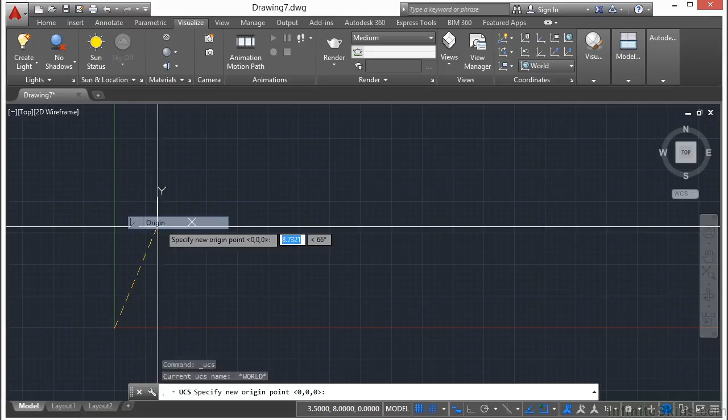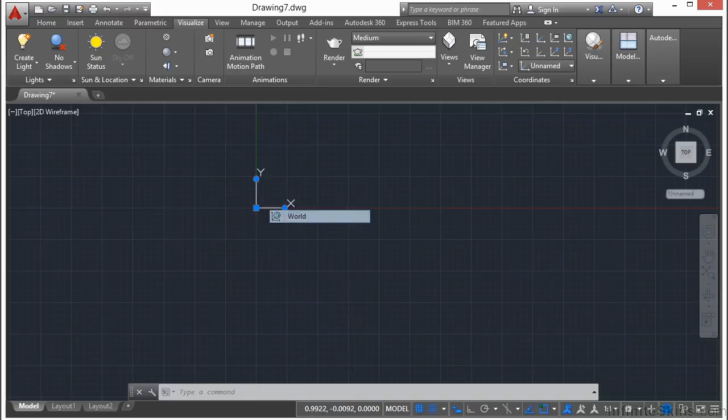You can select that by origin. So you just pick a new point, and there's the UCS. And you can see that little box is off in the corner. That tells you that this is a customized user coordinate system, not the world coordinate system. If I select the UCS, I also get some grip options, which we'll talk about later on. But if I right-click on it and click World, that puts me back to my regular world coordinate system.

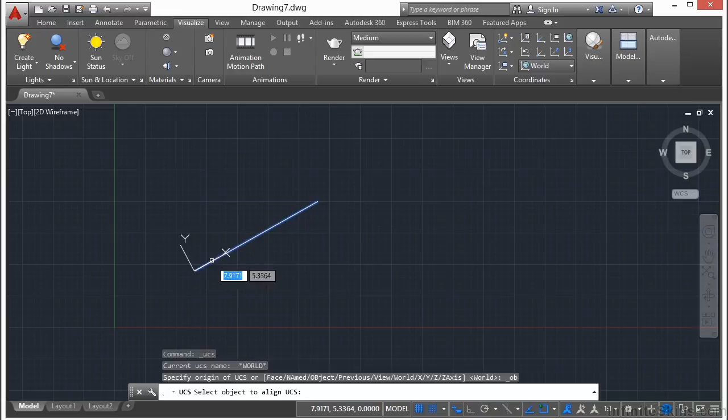So if I have a line, or any other object, I right-click on my UCS icon and select the Object option. I pick an object, and as you can see, it gives me a little preview. That becomes my new user coordinate system. It moves my UCS to a new origin and rotates it to match the angle of the object I selected.

So now if I draw a line and turn on ortho by pressing F8, it locks me into orthogonal lines, which are normally perfectly horizontal or vertical, but in this case it's matching the horizontal and vertical of my new user coordinate system. So this is a great tool to draw things at specific angles quite easily.

Now, when you work in 3D, the UCS is key. There's a function called the dynamic UCS feature that will automatically change your UCS to match the face of an object, allowing you to draw on the same plane as the selected object. That's probably one of the most common cases of changing your user coordinate system, when you're working in 3D.

That's getting a little bit heavy for this course, but it's hard enough to keep track of just 2 axes, much less 3, 4 or 5 different coordinate systems. So we're going to try to keep it simple for you in this introduction. You can create your new UCS from scratch by picking a couple of different points. You can even select the icon and just rotate it or move it.

Of course, my ortho is on, so I'm going to turn that off. And as you can see here, it's quite simple to just rotate the UCS that way. You can grip edit it just to move it to a new place or to make slight rotations, whatever you need to do.

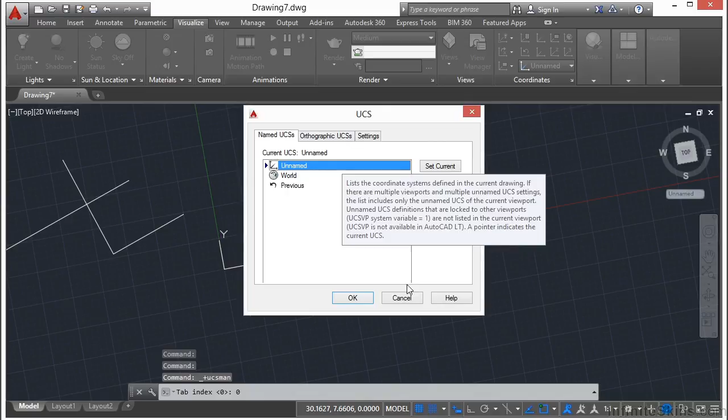So I can get to it that way, which is a real easy way to manage it, or I can come up here to my UCS named UCS option. I can select that, gets me back to the same place. Or I go to my UCS icon, right click on it and click on the named UCS option. So when I come here, it tells me I have three different options.

Essentially, I can go back to world coordinate system. If I select it and hit the set current option, then that's where it will take me. It'll set this selected UCS as my current UCS. Now I can select the previous one, and that will take me back to whatever UCS I was using right before the current one. Now this is the current one and it's unnamed.

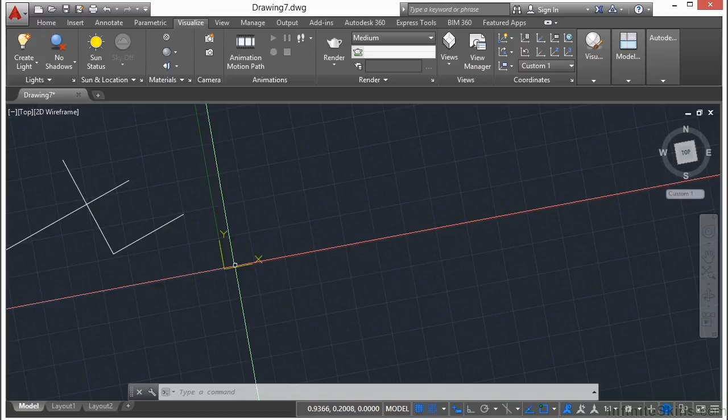If I select inside this box, once I pick it again, I can give it a name. I'm just going to call it Custom 1, press Return. Set current, and it's current. I click OK, and I have it saved in here now whenever I want to use it. So let's say I go back to my world coordinate system.

And if you note here, I'll open up my UCS Manager, go to my named UCS. I have the Custom 1 as a possibility. I select it to highlight it and then hit Set Current. Click OK, and it brings me right back to where I was. So if you go to the trouble of creating a custom user coordinate system, then you really need to save that in case you need to go back and continue working where you were before.

So that's one trick that you can use to help you work in a different coordinate system and to manage that as well. Using a rotated UCS is great for isometric drawings, as you could probably see. But AutoCAD does have a specific mode for that called isometric mode. This allows you to toggle your rotation very quickly and is actually quicker and easier to use than UCS.

Let's open up our drafting settings dialog box by right-clicking the snap icon in the status bar. So you come down here, right-click on it, go to snap settings. So go to the snap type option here and click on the isometric snap. That's what you're going to want to do. You want to turn that on. That will turn on isometric mode, and click OK. So now you see here, you have a sort of skewed and diamond-shaped set of crosshairs.

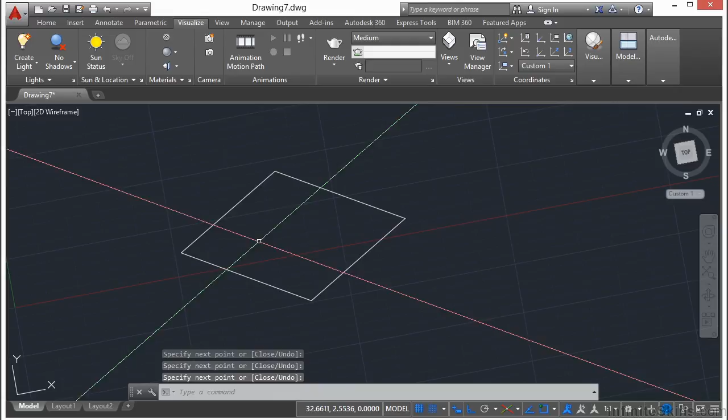So let's start drawing. If I draw here and I turn on F8, this will lock me into isometric mode so that I can now draw 3D isometric set of line works. So I can kind of draw an isometric view of a cube. So I can come down here and I can press F5 to toggle through my different isometric planes. And you can see as I toggle through them, my axes change.

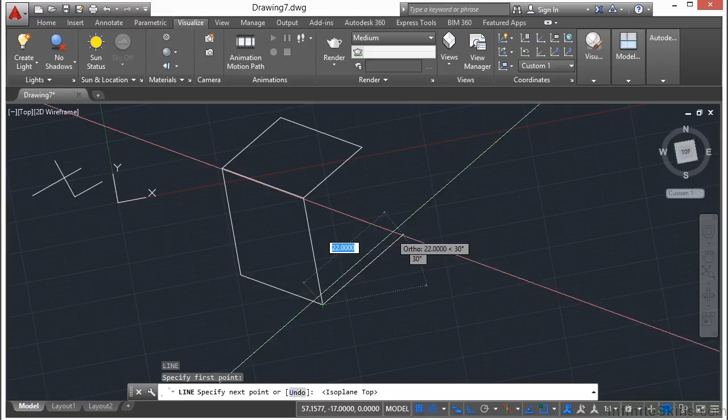And so by very quickly pressing the F5 button, I can very easily draw whatever it is I need to draw. It looks like I've drawn a 3D box, though I've never left my 2 dimensions. So whereas drawing with UCS can make an isometric easy, it's in one plane only. So you have to keep changing your UCS to get that special look that you need.

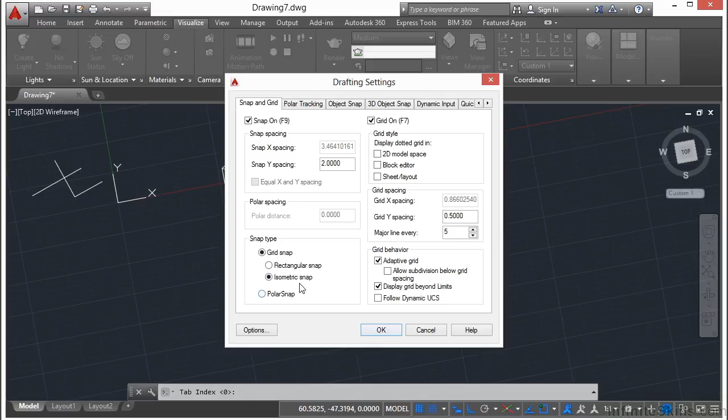You can also use the isometric settings, and you can go to that just by right-clicking on the snap settings, click the snap settings button, and make sure the snap type is turned to isometric to do that special view. And you press the F5 button to toggle through, or you can click here on the status bar to toggle through the different isometrics, tops, and other views that you want. And when you're finished, make sure you turn this back. And there you go. So you can see how a UCS that you've customized can really help you out in making specialized drawings.